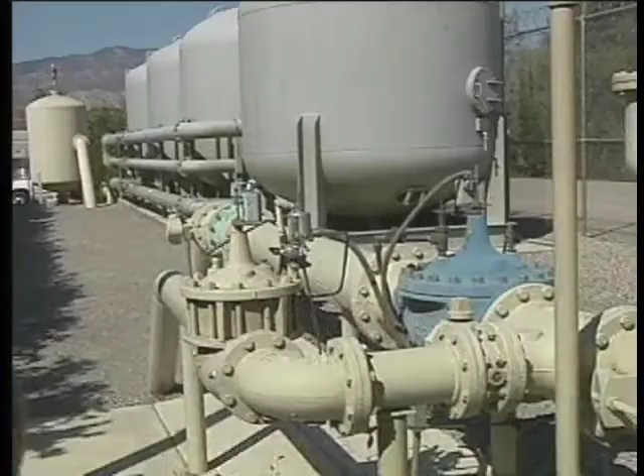This well was put into service in the mid-60s, directly into our distribution system, approximately 1,000 gallons a minute. About 1997, we got a detection of PCE in our system. As we approached the maximum contaminant level, we decided we're going to have to do some sort of treatment or abandon the well.

There are a number of solutions and difficult decisions to make. Is it cost-effective to re-drill a new well? Is it cost-effective to put in a treatment plant or point-of-use type of treatment, or go elsewhere and find some surface water and use that for supply? What appears to be the best buy up front may not necessarily be the best long-term solution. In time, the easiest, cheapest solution could cost the most and end up bankrupting your company over time.

Nobody wants to make the wrong decisions, so knowing what to do and when to do it can go a long way in helping to avoid major problems down the road. In the following program, we're going to look at the decision-making process for maintaining and obtaining compliance. We'll use a decision tree to guide us through the process from identifying the problem to the final solution.

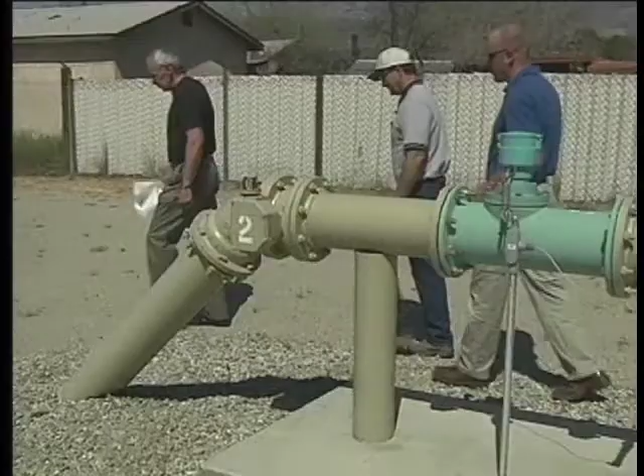This East Valley Water District facility in San Bernardino, California, had water supply sources that were exceeding the nitrate MCL. They applied to DHS for a permit to construct a treatment plant for the removal of nitrate and are now in full production. Let's join Brian Zinn, Senior Project Engineer for Basin Water.

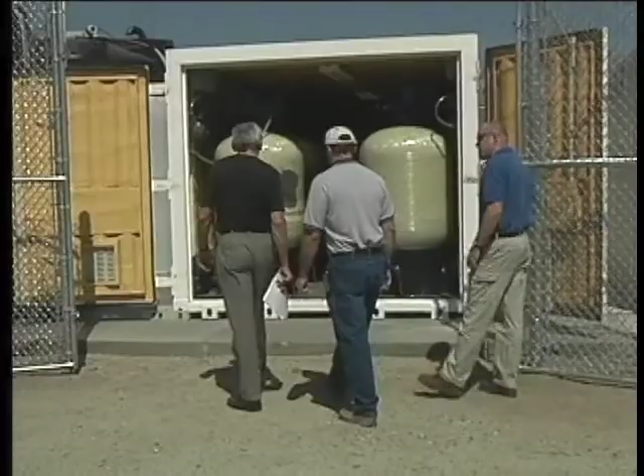What we manufacture are ion exchange units. This container here is a 10-foot by 30-foot container. It's a 1,000 GPM containerized treatment unit. It's completely fabricated in our shop, and it's prefab. We put it on the site and it's ready to go.

What we do is the raw water comes in through this header. The first thing it hits are the pre-filters here. These are 5-micron bag filters. They're used to remove particulate matter, sand, dirt, anything like that out of the well water. The reason being is we want to protect the ion exchange resin from being fouled by this material.

Once the water goes through the bag filters here, it goes out this header, and then it goes into the treatment unit, which we can go look inside of here. And I can show you the vessels.

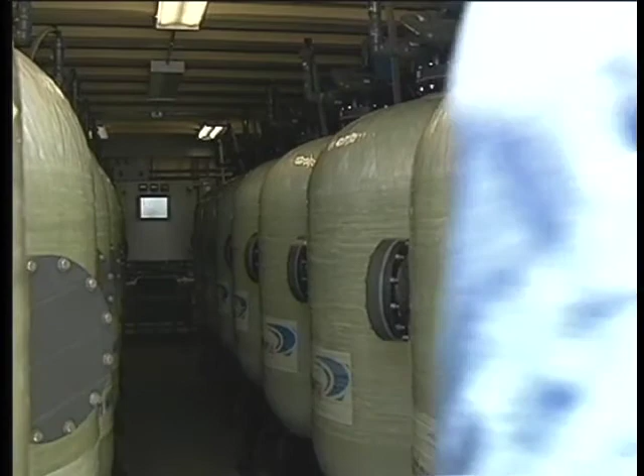Okay, this is the inside of the treatment unit here. Inside of the treatment unit are these large fiberglass vessels which hold ion exchange resin. The ion exchange resin is capable of removing nitrates, arsenic, perchlorate, uranium, chromium-6, vanadium, and several other contaminants. At this particular site, it's being used to remove nitrates.

What happens is the raw water from the well comes into the unit through the bag filters, which we already saw. That removes any particulate matter. The raw water, which is high in nitrates, then enters the top of the vessels, which are in service, flows through the resin. The resin removes the nitrates, and then the treated water, which is now low in nitrates, exits the bottom of the vessel and enters the distribution system.

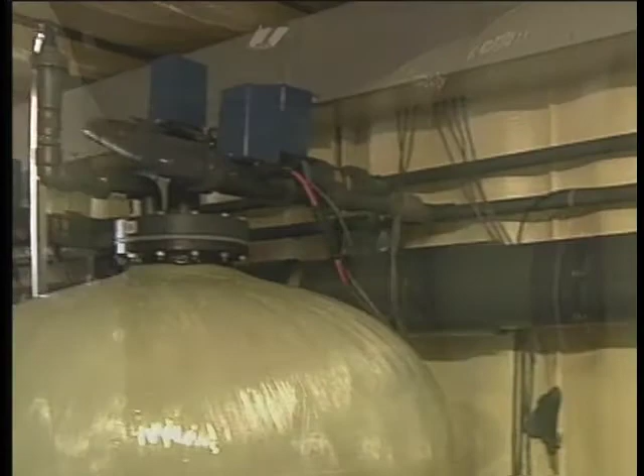The vessels are all controlled by a computer system, which is located at the other end of the treatment unit, which we can go look at here. The ion exchange process is actually quite simple. We're simply attaching nitrate ions at this site onto the ion exchange resin. Once the resin has reached its capacity, the resin needs to be regenerated, which we do with a sodium chloride solution, a brine solution. The brine solution is pumped across the resin. Once that's done, we then need to rinse the vessel before we put it back into service.

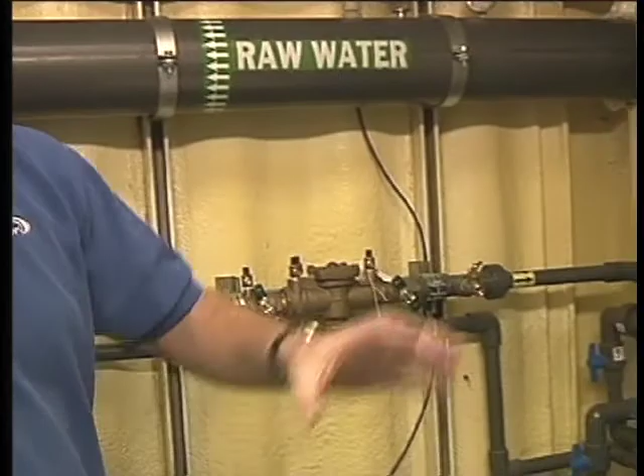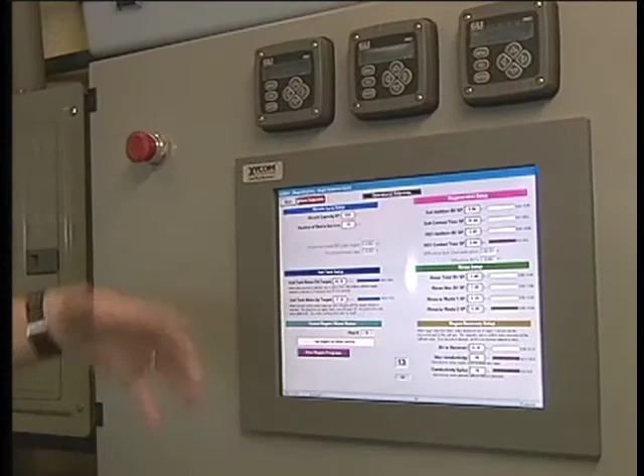All the motor-operated valves, miscellaneous piping, and eventually the computer are used to control the regeneration, rinsing, and sequencing of the vessels. The computer here provides a display of everything that's going on to the operator. We can enter set points to adjust the unit for nitrate, arsenic, whatever application it is. We have alarm set points. We also have trending. It's a fully functional HMI package. The unit's designed to be unmanned. If there's any alarms, the unit will dial out to the operator.

As part of the regeneration process, as we described inside the unit, the vessels are full of ion exchange resin, where nitrate is attached to the resin beads. Once the resin has reached its capacity, the resin needs to be regenerated. When we regenerate it, the resin stays in the vessel, and we pump a salt solution, sodium chloride solution, across the resin. And as that happens, the chlorides reattach themselves to the ion exchange resin beads, and the nitrate leaves the beads in a liquid stream. The liquid stream is then stored in a waste tank.

Now, to make this regeneration process work, we have a salt storage tank here. This stores a saturated brine solution. This is full of basically table salt. We keep liquid at the bottom. That's our salt solution. When necessary, the treatment unit will take a vessel out of service for regeneration. It basically turns that vessel off. We take the salt solution out of this tank, pump it through the vessel across the resin. That removes the nitrates. That stream then comes out of the treatment unit and is stored in these two large waste tanks over here.

The waste disposal is taken care of by a truck. There's large white PVC pipes on the bottom of the waste tanks, which are then piped to a locked box out on the street. A waste hauler, which is a large truck that can handle about 5,500 gallons, drives up, connects to a Camlock connection, and basically sucks the tanks empty and takes the waste away to a disposal site.

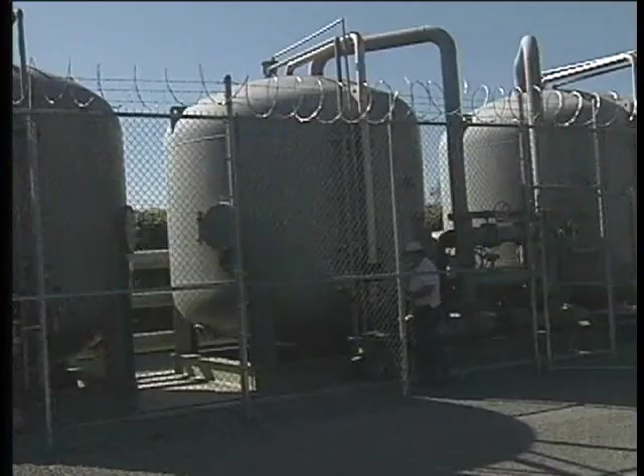Just a few miles away, also in the East Valley Water District, is a well that was in service for 30 years before perchloroethylene, or PCE, was detected in the system. Rather than abandoning the well, they opted for treatment. Fred Stafford is the water production supervisor. We decided after extensive study to put in the liquid phase granular activated carbon cells that you see in the background.

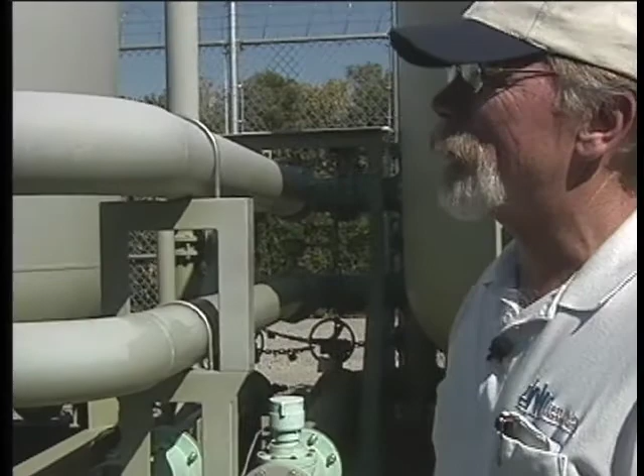The effluent of the well pumps directly into that singular tank to the left of the 4 cells here, where we drop out the heavier particles, and then pumps directly into this top pipe here, which goes over into our manifolding system and directly to the 4 cells for the treatment process.

The water comes into the top of these cells where it goes through this granular activated carbon. This is an example of what's in there. As the water flows through this carbon, the PCE, the contaminant here, attaches to this carbon and begins to saturate that. You'll notice in the background we have different stages where we sample for PCE at different stages of the carbon to see where the breakthrough might be.

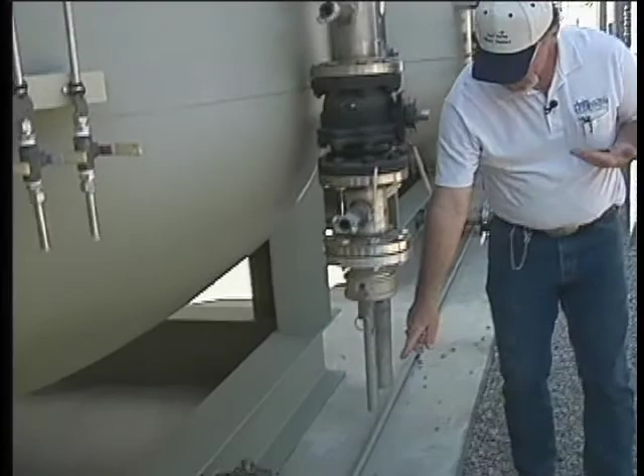Before we get a detect at the effluent of that cell, we're going to remove the saturated carbon from this cell and replace it with freshly regenerated or virgin carbon. When we pull the carbon out of this cell, it comes out through this apparatus right here, is pulled through a vacuum into a tanker truck. He then attaches a hose from his fresh compartment and fills the chamber again with 20,000 pounds of reactivated carbon, and we're ready to go again.

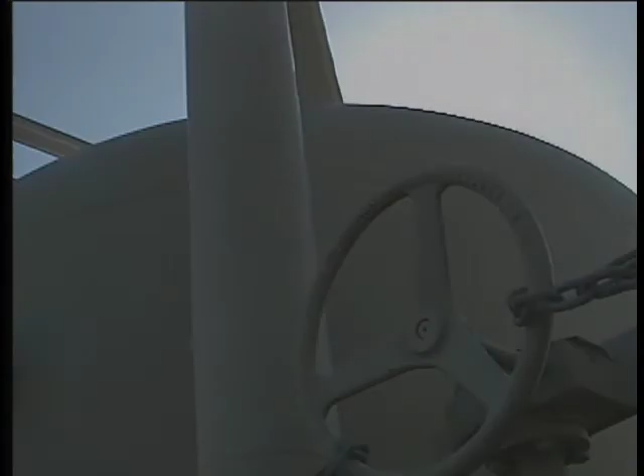Fortunately, we're able to take one unit offline at a time without taking the plant off of line. We can continue to pump at full capacity while we're doing the reactivation of one of our cells. Now that we have a better idea of what a treatment facility might look like, let's pick up with Steve again and talk about costs.

If you choose treatment, you need to look at the cost of the operator, the cost of the chemicals, the cost of the power, and the cost of waste. I'll give you an example. If I spend $1 million on putting in a new source, then over 20 years that will cost each customer about $25 a month. If I choose a treatment option where I have to pay an operator $65,000 a year, the customers are going to be paying $50 per month per customer. So this is a long-term cost.

Clearly, if we spend $1 million up front and get a new source, the savings to the water system is tremendous in its monthly bill because we have that built in, the much lower cost. We're able to pay it off over time. So you really need to look at those cost options. In the long term, you may find the operation and maintenance cost for running a treatment facility will be greater than your capital cost for building the plant.

What drives those O&M costs are that you're going to have media disposal, you're going to have additional energy costs, you may be discharging to the sewer who's going to charge you capacity charges, a lot of related tangential issues that are going to come back and get you. So, personnel to run this treatment site. Are these people of the appropriate grade as far as a treatment operator goes? That can change. That's very true.

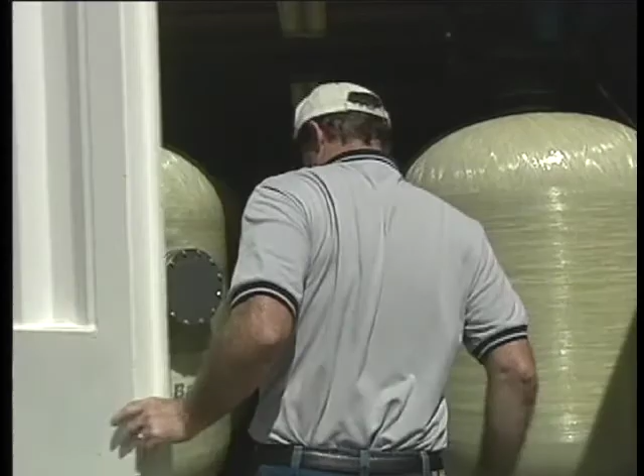When we added the carbon activation units, again, we're coming out here once a day, but at this point in time, there are quite a few more items that we have to check. There's more readings that we have to take, differential pressures, more maintenance items, security issues that we have to check out here. Not to mention that about once a year, we have to reactivate the carbon in each one of the cells.

Most water treatment plants have your initial capital costs, but water utilities are today realizing that it's the operational expenses, the monitoring expenses associated with a treatment plant, and finally the disposal of the waste residuals generated by the treatment plant that generally are their largest cost concerns, and they determine whether or not a lot of treatment plants are built. Another important issue to consider when looking at treatment alternatives is whether or not the treatment plant will fit at the site. Is it compatible with what's around it?

Do you have the utilities available? This well site is pretty typical of a lot of well sites. They may even be larger than many. What you find, though, is there's not a lot of room here available for adding treatment, for being able to maintain this facility after you construct it. For example, if you were to put an arsenic treatment plant here, you would have 26-foot tall, 12-foot diameter tanks at this site. And you can picture that that's not going to sit very well with the people that live next door.

Once we decided to go with this type of treatment process, one of the considerations that we had to make was, do we have enough room at this site to do what processes we need to do? One of the considerations was, do we have the room to bring a truck in here to pull the spent carbon out of these cells and at the same time bring a big enough load to place new carbon or regenerated carbon back into the cell?

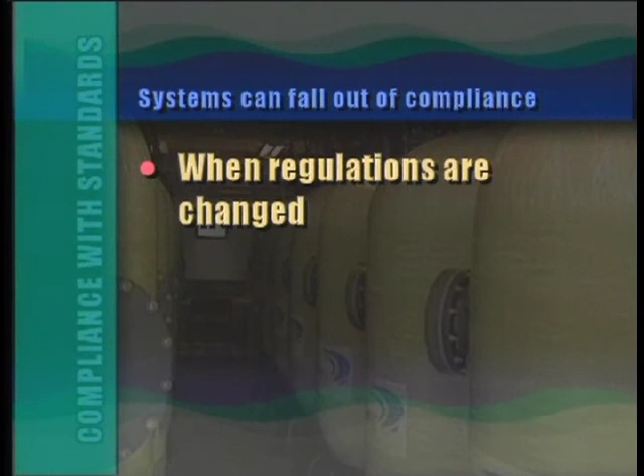As the maximum contaminant levels allowed in drinking water by the EPA are reduced, more and more utilities face problems of non-compliance. For example, as the level for arsenic dropped from 50 parts per billion to 10 parts per billion, the several hundred systems in violation turned into thousands. Systems can fall out of compliance when regulations are changed and/or contamination impacts a water source.

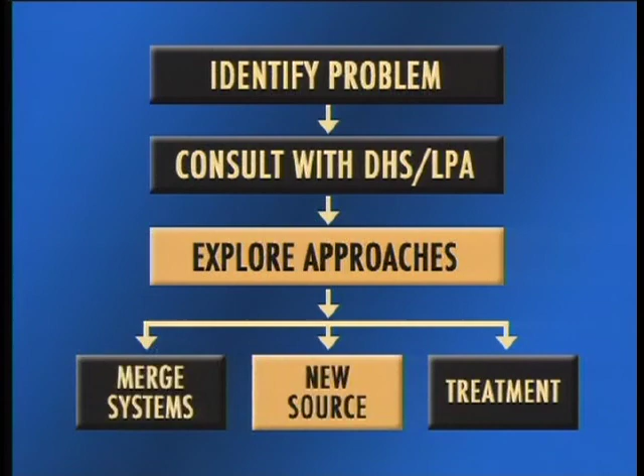To guide you through the process for maintaining and obtaining compliance, we suggest you use this decision tree. The first step is to identify the problem, then consult with DHS. The next step is to explore approaches, which includes ways to merge systems, finding a new source, and considering treatment.

Causes of contamination can be natural, for example, naturally formed chemicals in the soil, or man-made, such as accidental toxic spills. Examples of the most common contaminants include arsenic, nitrate, perchlorate, perchloroethylene, uranium, chromium, petroleum, lead, and mercury.

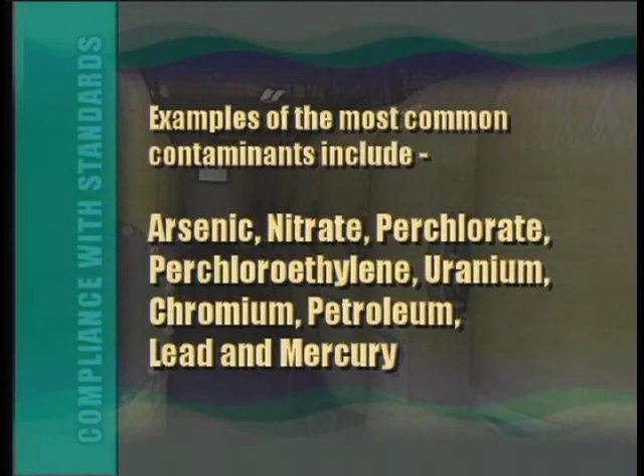Adhere to your schedule for monitoring and increase the frequency if you are suspicious of changes in levels of contaminants. Make sure that water quality measurements for contaminants are taken at the point of entry into the system and not some distance away. Keep up to date on primary drinking water standards. Be active in the water community. Visit the DHS website on a regular basis.

Consider joining a professional water organization like American Water Works Association, California Rural Water Association, the Association of California Water Agencies, Rural Community Assistance Corporation, or any one of a number of other organizations.

As soon as you identify a contamination problem, you should contact the Department of Health Services Division of Drinking Water District Office. DHS will help you to identify problems, refer you to third-party assistance, and help you to identify information on financial assistance. They may also suggest that you consult with engineers and/or scientists to identify solutions.

When you hire consultants and engineers, remember that you are in charge. Make sure that the engineer looks at options that are appropriate for your water system. Don't jump right to the treatment option. This decision may saddle the system not only with capital cost, but also with ongoing, higher than expected operations and maintenance costs. Be careful to explore approaches thoroughly.

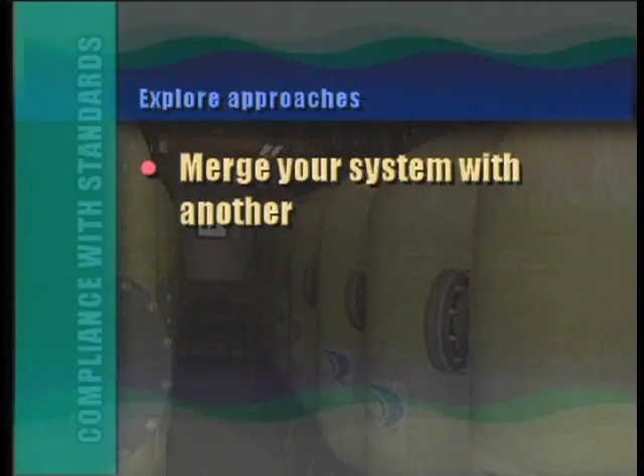One way is to merge your system with another. Even if this means going out of business, better now than bankruptcy later. Another approach is to find a new source at a second location that does not have a water quality problem. In the long run, drilling a new well or finding surface water is probably less expensive than treatment of contaminants at an existing source. Treatment should be the last option you consider.

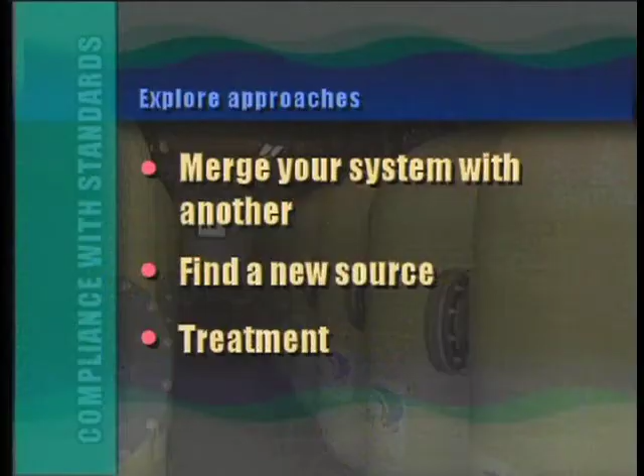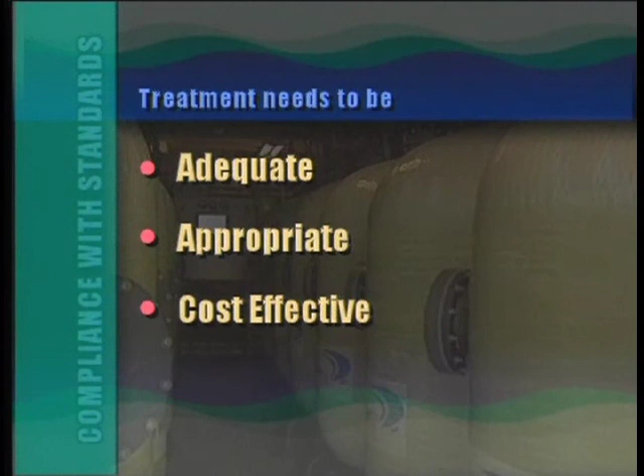And if you do choose treatment, there are a lot of very important considerations you need to study. Treatment needs to be adequate for the size of the water system. It needs to be an appropriate technology, and it has to be cost effective. It is extremely important to look at the long-term costs of operating and maintaining a treatment plant. What may appear to be the best buy up front may not necessarily be the best long-term solution.

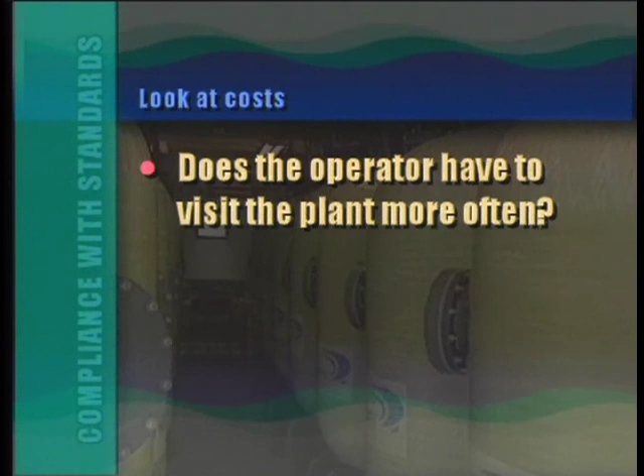You need to look at the cost of the operator. Does the operator have to be trained? Does the operator need a higher grade of certification and a higher salary? Does the operator have to visit the plant more often? You need to look at the cost of chemicals and filtrates. Do they need to be replaced or regenerated? You need to look at the cost of energy. How much more power are you going to need to run the plant?

You need to look at increased monitoring costs and laboratory expenses. And you need to look at the cost of waste disposal. It can be very expensive, and you will have to comply with more regulations, especially if the waste is considered hazardous.

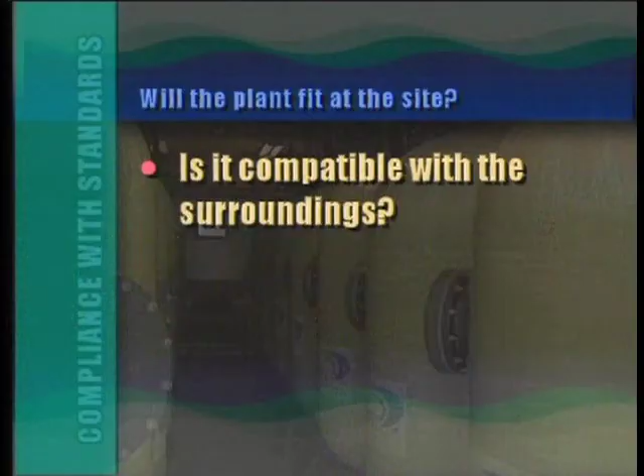Of course, the physical size of any proposed treatment unit or plant may be prohibitive. Will the treatment plant fit at the site? Is it compatible with its surroundings? Are there adequate utilities available? Is there room for loading and unloading? Will the neighbors be happy?

As part of the treatment option, consider blending as a possibility. You may only need to treat a portion of your water supply so that after blending it back into the original supply, the water is in compliance with MCLs. Blending can save on chemicals, waste disposal, O&M, and capital costs.

Whatever your solution for solving the contaminant problem, make sure that it is equitable for the community. Make sure they are involved in any decisions that may affect them. You may have to raise rates, the kind of customer service may change, and even the water may taste different. Arrange for public meetings. After all, the water belongs to them.

Finally, the Department of Health Services has to approve any interconnection with another system, any new source, any blending of existing sources, or the addition of treatment. Any change that you make will have to get permit approval from the Department of Health Services. Well, that's it for this program on approaches to compliance with standards.